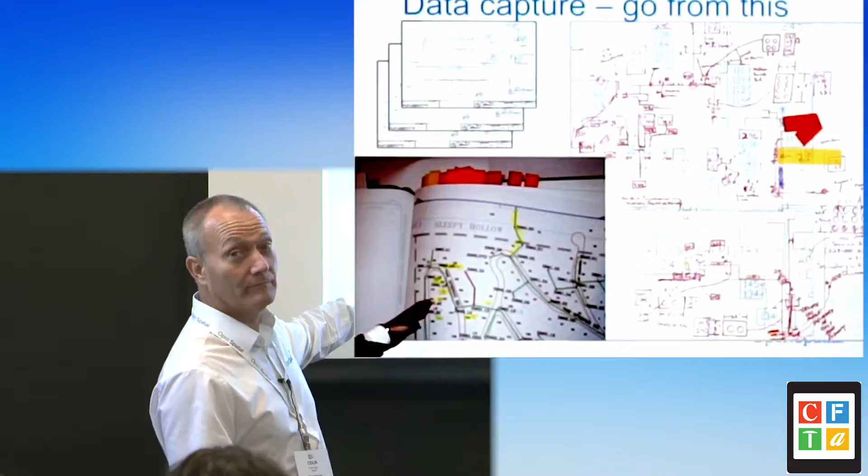There's some places with map books, paper map books. This organization actually had 3 of these map books, and each page has changes on it like that one. Okay, that's a problem. Or you have CAD stuff like this. You have a system-wide base map or a map for each utility, or, and this is subdivision on campus, you'll have your capital improvement projects, where you have CAD data coming in at different scales, different places, coming from consultants, in-house, whatever it is.

So the trick is, how do you get an asset inventory for any of the utilities? How do you get it out of here and into a manageable form? Common CAD stuff. This is actual campus data. CAD is great. You can draw anything you like. You can draw it really accurately, and it communicates a design intent. But it has challenges when you're trying to make GIS data.

Challenges like the line work is broken. You could never get out of this the total length of lines by diameter. And more importantly, what if this pipe breaks here? Where do I need to shut it off? If this is your data, that line is drawn straight down there, there's a gap. This thing is not broken at the T's. It's not modeling ready, it's not attributed. It's a picture. And it may even be schematic, not real world, so it's not even GPS.

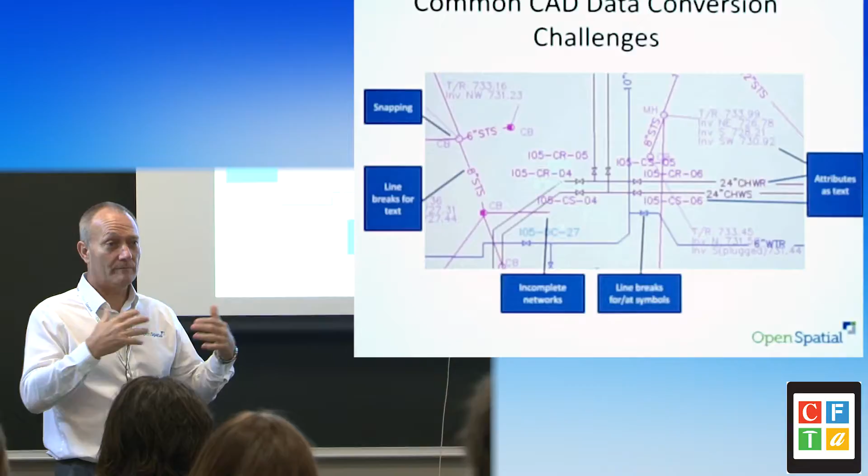So these are challenges. The most important and most challenging problem is attributes. The human brain is great. We can look at this and say 24-inch chilled water return supply. We can even go, hey, inverts, that means northeast, it's this one, and it's this end of that one. Well, that doesn't gel when trying to get a computer model of where this stormwater drains based on the design plans we have. How do you do that? Okay, I'll show you. Let's look at this a little bit.

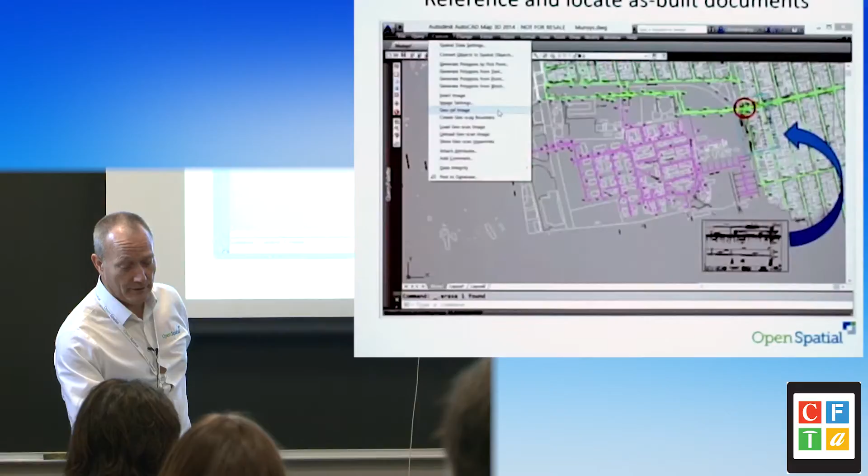If you have scanned plans, the first job is scan them and stick them in either document management or a folder structure. What we do is take the ones that have a plan view that you still want to get, and go in. This is Munsys, by the way. I'll show you live, so I'm not going to give you all that. But it's pull-down menus that are way over and above everything you get in AutoCAD, but built on Autodesk functionality.

If you know CAD, you can take an image, insert it into a drawing, scale and rotate it, and there it is. Then you save your drawing, and if nobody knows you saved it, no one will ever know you took the trouble to line it up. They'll probably just do it again. And that's fine. So we have tools for insert and georeference built in automatically. I just showed the points, georeference it, then create the geoscan boundary. So you see that little blue box?

That's the easy boundary. Just take the piece of paper, and I know the project plan is probably only half the piece of paper, and if you want to, you can draw a polygon there. But those polygons, when we use that function, we automatically create and extract from the image the path, the name, and then you can go in and add, well, what's the project number and what disciplines was it in? Some metadata like it was sewer or water or it was chilled water or whatever it is, and put it in there, and then save that little box as a GIS piece of data.

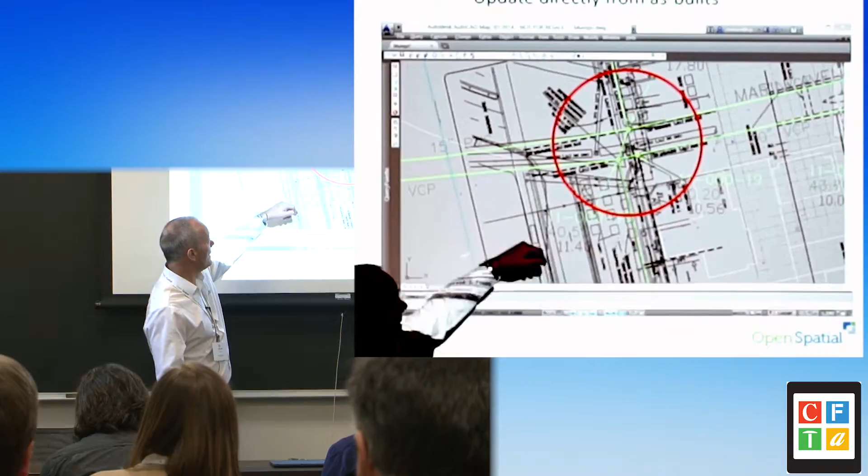What does that mean? If you do that on a bunch of plans, it means you can go anywhere on campus and say, what plans do we have on record right here? Because a lot of folks will tie a plan to a discipline. Well, the thing is, these plans have a lot of information on them. This thing has stormwater, there's the sewer being pulled off, heads up, digitized, but there's storm, there's traffic, there's electrics, there's a lot of extra stuff.

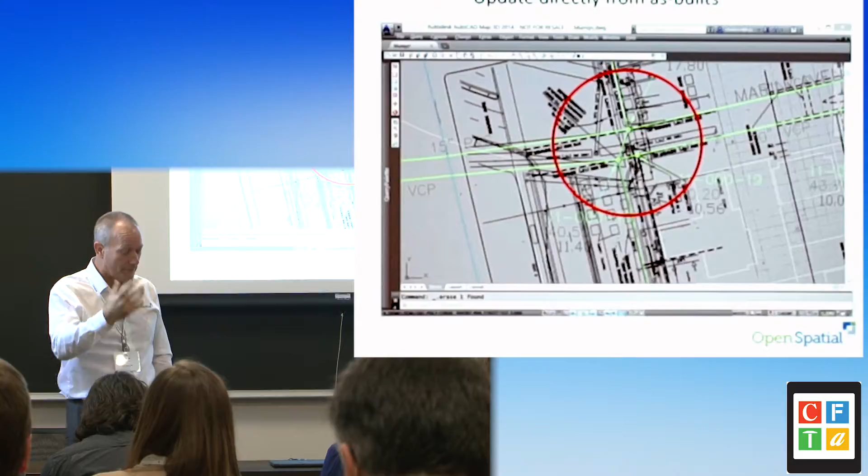So are you really going to go and put that file name on every one of those utilities? Probably not. Just put it down as a box, and now you can do a point in polygon. Hey, we have a GIS. If I'm at this point, show me any of the boxes that cover me, and I can list them and give you the file names. So that's what you can do. I mentioned that when I move on.

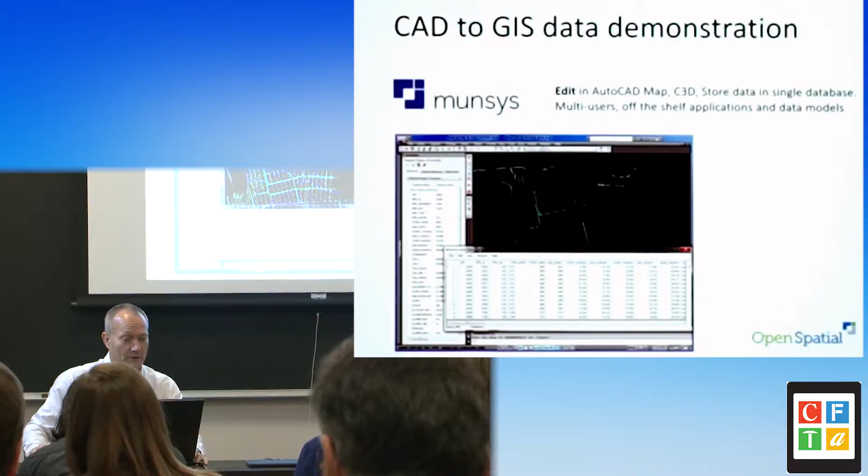So let's look at Munsys. Looks like CAD. Actually, it's not. Here's a listing of all of those things that you see right there, and here's the columns. So let's actually take a little look at that live. So I've got a live project that I have been working on, and so we can show you. So Munsys, oh, don't worry about my desktop. There we go. Good. All right.

So Munsys is an application that sits on top of AutoCAD. So if you know AutoCAD, you know 80% of this product. Training is a matter of days, okay? Because all you've got to learn is what are the feature classes and what's the concepts behind it. I show you a blank canvas, but I'm going to come back to that. Let's say you have a drawing like this one.

So first thing, normally your CAD drawings, you'll see these ones are either twisted or aligned. Well, that means I took the CAD drawing and I put it in real world coordinates. So twisted means this thing was drawn to fit on the piece of paper, and now we've put it in real world, so it's right there. And you can actually go in and check that the coordinates you see here are the ones you see down there. You can see it's got a coordinate system assigned. So there's a bunch of steps you need to go there.

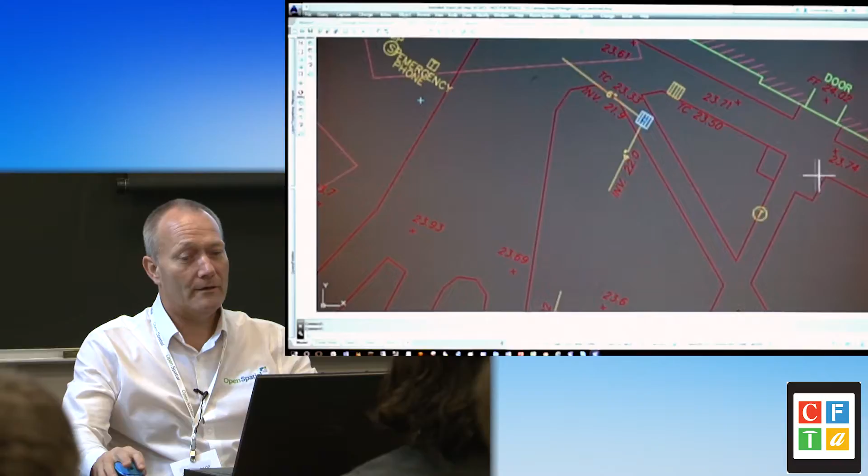But here's the campus CAD map, right? And it's the survey version thereof. So this is just CAD. If I click on that thing, it's a block. Okay? It's a drainage inlet structure. And this is a 4-inch line. Actually, it's 2 lines. It's that one and this one. And it's a piece of text. So how do you get that to be a real piece of data? Okay? It's located pretty good.

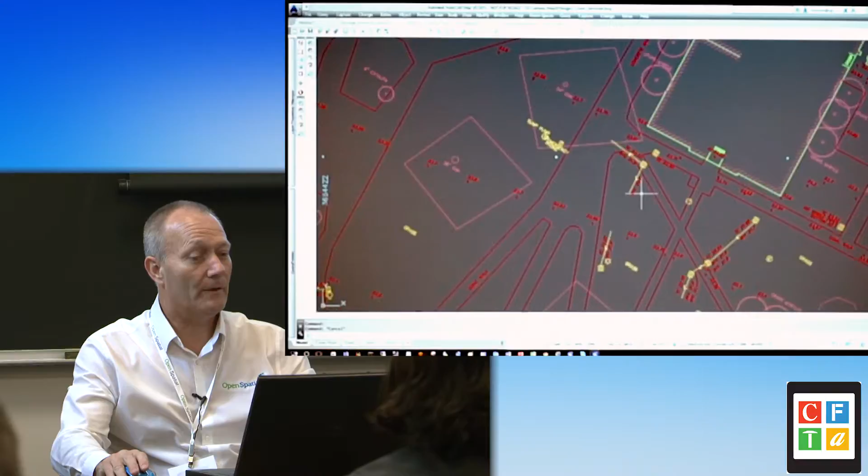If I turn on the image just to do a sanity check, no pun intended, and if I'm on a network, eventually I'll get a picture; I'm on a hotspot. So there you go. Okay? So now already I've got the CAD located. You kind of check that stuff, and you go in and do that. I'm going to turn that off because it's really going to make it pretty slow. And if you draw this out, this is CAD.

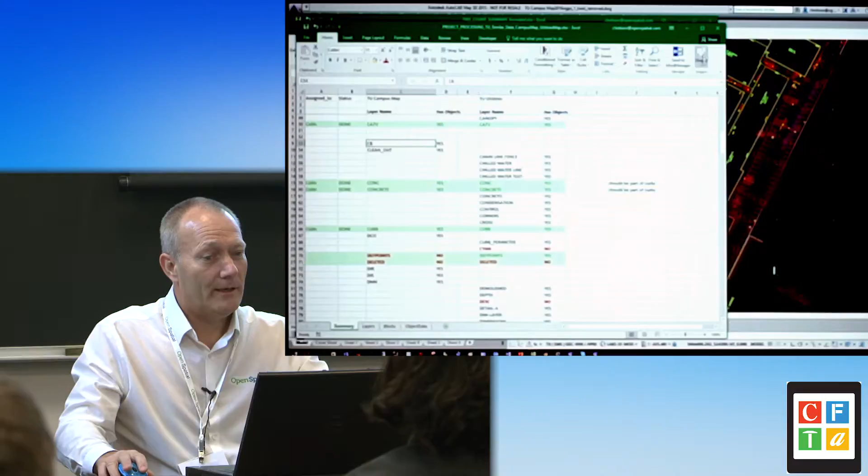So what do we do with this? I'll take this CAD drawing and I run an analysis on it. I'll come in here and let's go and open recents. There we go. I took that CAD drawing and ripped through it with a little analysis. Actually, they have 2 CAD drawings. The one is the campus map and the other one's the utility map.

The campus map has some utilities. They're being surveyed, so they're spatially accurate, but they're incomplete because the surveyor really doesn't know where the pipe actually goes. He just knows that from this manhole there's a pipe. Where does it go? Not so much. The utility map is the old schematic that knows where the pipes go. They're just not located very well because they were drawn in CAD over the years.

And that's very typical of what you get. Actually, this CAD data, certainly on this map here, is pretty good. It's laid out, so we can pull out the layers. So if you go to every layer, that's a summary. Each layer is this: this is the layer name, and this is whether it has data on it or not, right?

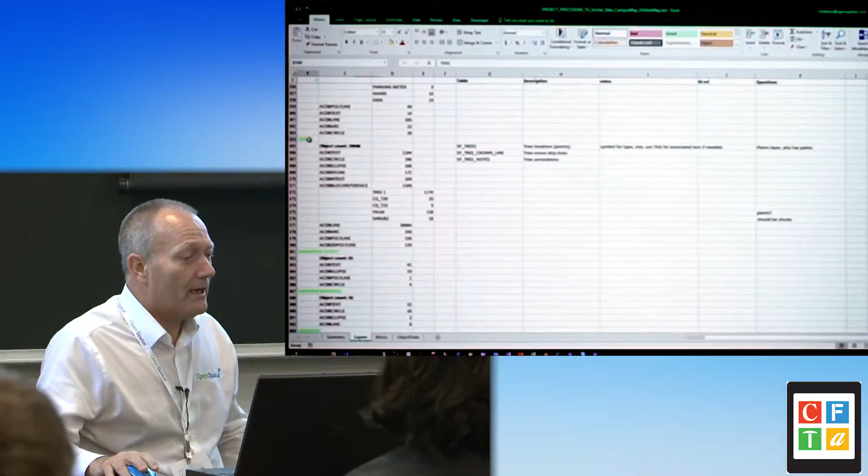So then if you go to each layer, you can say, let's look at, say, trees. I'll scroll down a little bit. So on the tree layer, we had a bunch of text, circles, ellipses, P-lines, text, a bunch of blocks. So there's the trees, and actually there's the count of the trees. So that's probably where most of the data is. And then there's some lines and arcs and polylines and stuff like that.

So how do you get this CAD data into it? We also look at the blocks themselves, what layers they're on. So if I go to the tree block, let's see. Yeah, here we go. Here we can see that it's pretty good. That means this tree block has all of them but one on the one layer. That's pretty good. Normally they're on all sorts of layers. But there is a red bud that escaped onto the elevations layer. And that's another thing that happens on CAD. The stuff just goes everywhere.

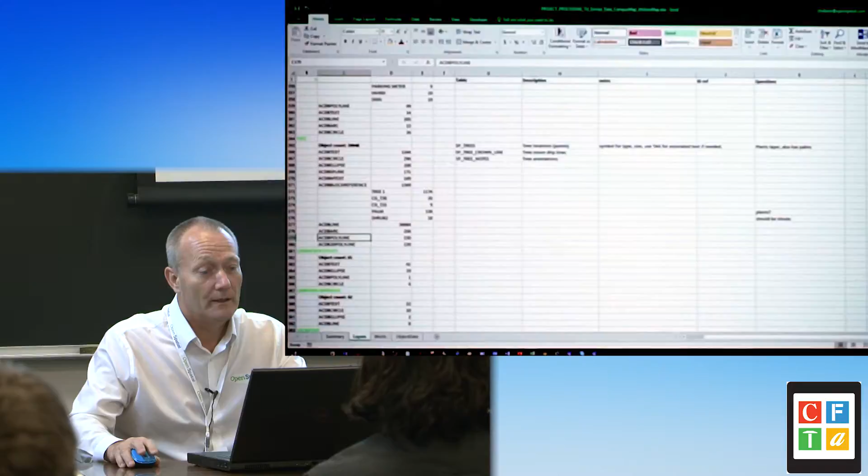The other thing you want to do is come in here and say, okay, now let's do the rel trick. So what I would do in Munsys, I can come in, and this is the other CAD problem, right? It used to be a tree block. Now it's a circle. Somebody exploded it. Happens all the time, everywhere. So that's the other thing you've got to sort out. So if we come in here, a lot of those guys are there, whereas these have not been exploded. So if I go to this guy, it's a block.

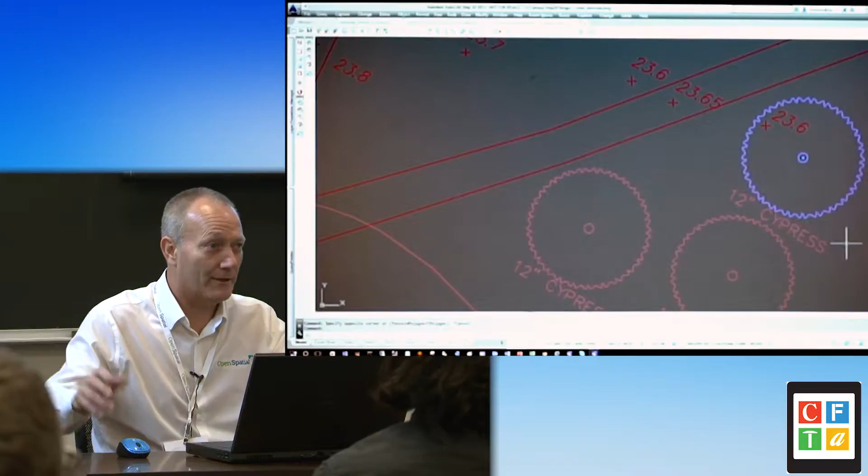Well, wouldn't you know, it's a tree 1 block, whereas it should be a 12-inch cypress with a block that looks like a tree. Okay? So that's kind of the difference. And that's a piece of text next to it. And then some of those have been exploded, so I've got millions of itty-bitty little lines all over and a circle in the middle and a piece of text. So those are all things you've got to deal with. Whereas the palms, they're pretty good. It's actually a palm block, and I can see it looks great, so that's fine.

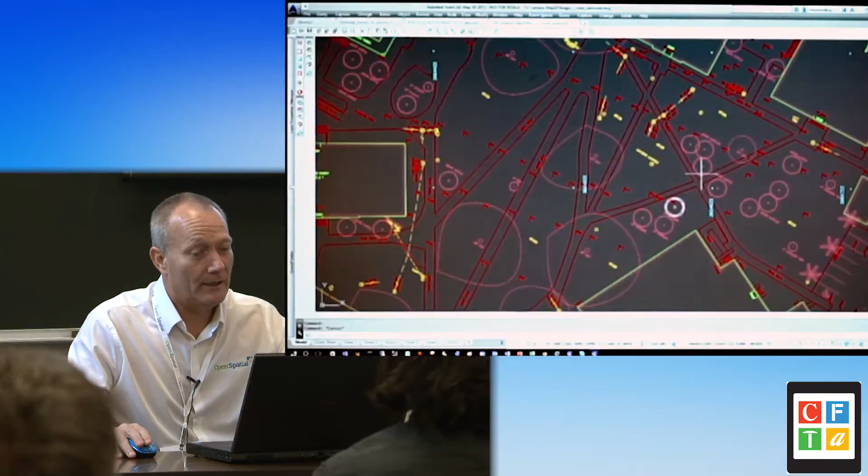So what we do in Munsys here is this trick between GIS and CAD. Munsys allows you to connect with the database. So one of the first things I did was connect to the database, and I'll just do it again so you can see. So this is a multi-user editing tool where you can have multiple people editing. It has full record locking. Each person can be editing different things at different times. And so I can come in here now and literally convert these things, if they're convertible, into intelligent database objects. So what's going on in the back end?

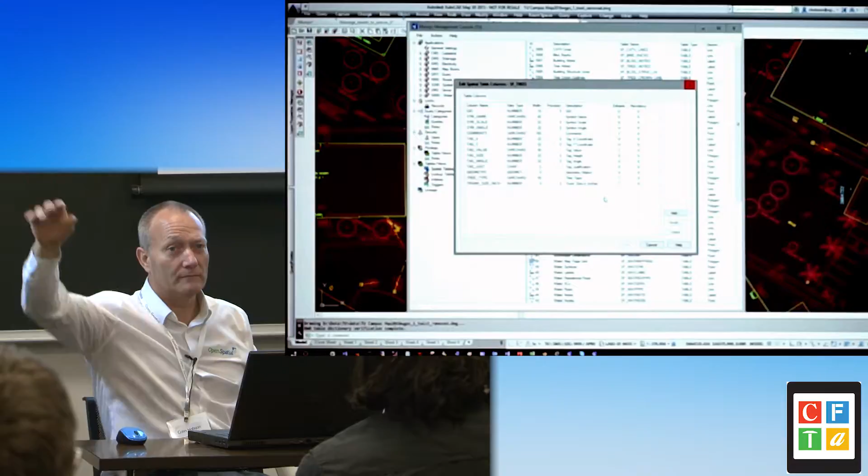In the back end, I've just connected to a schema of data. The schema means a set of tables in a database with all of their relationships and everything else. So if I look at the spatial tables, I actually have a trees table. There it is. And it has these columns in it. And what I'm going to do is take the CAD stuff, stick it in that table, and then I'll be able to do stuff with it.

So the way to do that: in Munsys there are different applications off the shelf. Sewer and drainage understand the difference between culverts and pipes in drainage, understand all the invert elevations, and have tools for you to automatically update those and build them out. Very, very powerful stuff. And to check that you've actually captured everything. I'll show you a couple of those. Let's finish up with trees quickly. So the Spatial Data Manager, that's our generic GIS. You can create any point, line, or polygon you like and add any kind of attribute to it that you like.

So let's go to these trees and see if we can convert some of them. One of the simplest ways is to go to capture, convert objects to spatial objects. If I come in here and go to trees, at this point I can just get the layer they're on. That's the simplest way. But that's going to miss out on a bit of information. That block actually does have information.

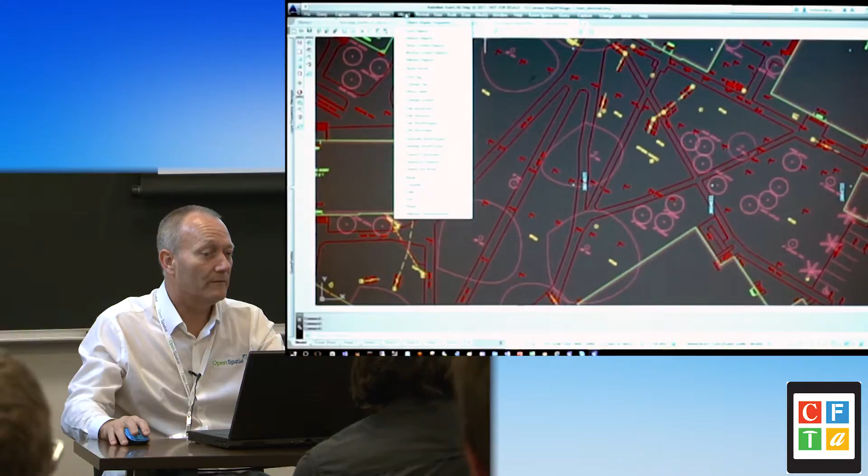70% of them, the block told me what kind of thing it was, so I want that. In Munsys we've developed - all these menus, by the way, are the Munsys menus. There's some CAD stuff like drawing over here. But if I come in here and use the Mun Convert, this is one of the bits of magic.

This is a Munsys thing that exposes all of the attributes of the CAD data, and you build it out. So step one is get stuff out of CAD into a database. Once you have it there in Munsys, you can still use CAD to continue maintaining it, but the data in the database is GIS data. It can be used by GIS. So that's bridging the gap between those.

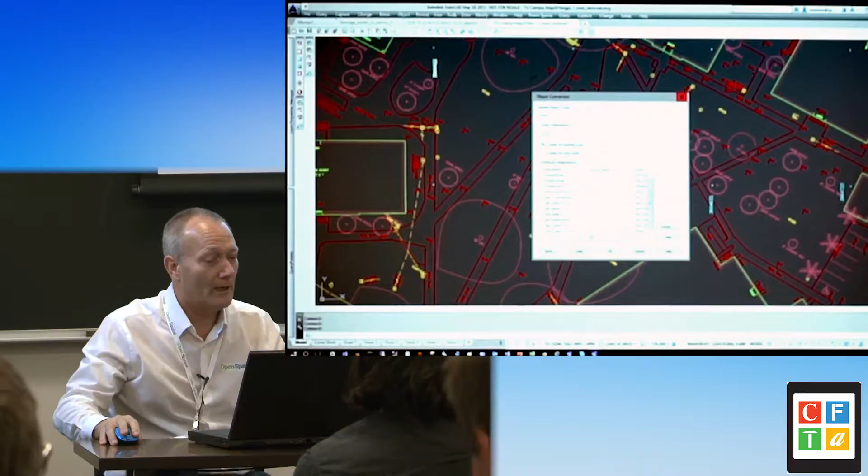Right, this tool, Mun Convert. You can go into, this shows you all the columns on that particular feature class. So I can go in on the symbol name and say, let's assign from the CAD drawing, I want the block.name - so this is all CAD properties. I can go to block name here and say, okay, that's going to go into the symbol name.

And actually I want the blocks because somebody took a lot of trouble laying them out, getting their size and scale - so this is symbol scale, so I get block scale there. And I want the angle, so I just pull that out of here, block rotation. So I'm building this out.

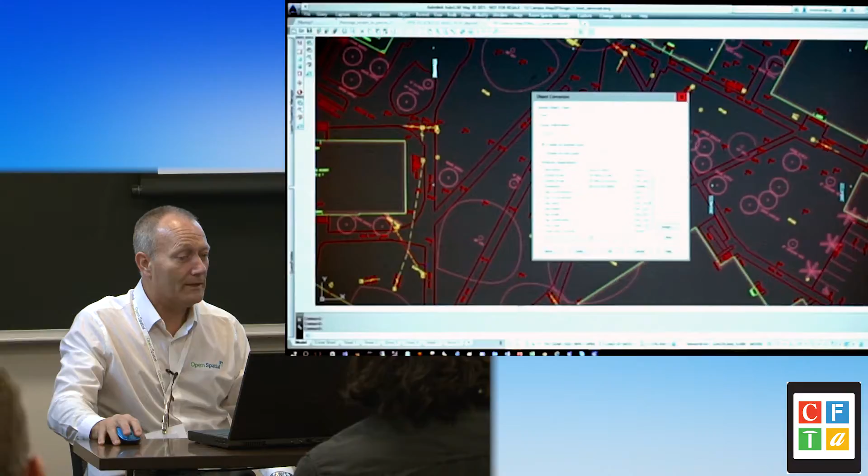I can put anything else in here I want, like I can assign a constant value, and I'm just going to put in that I'm messing with it, so I can come back and track it. There's all sorts of stuff - if I wanted to, I could do certain trees at a time and whatever, and I could save this profile and use it later. So if you actually have the same drawings over and over, you can define these data loading profiles.

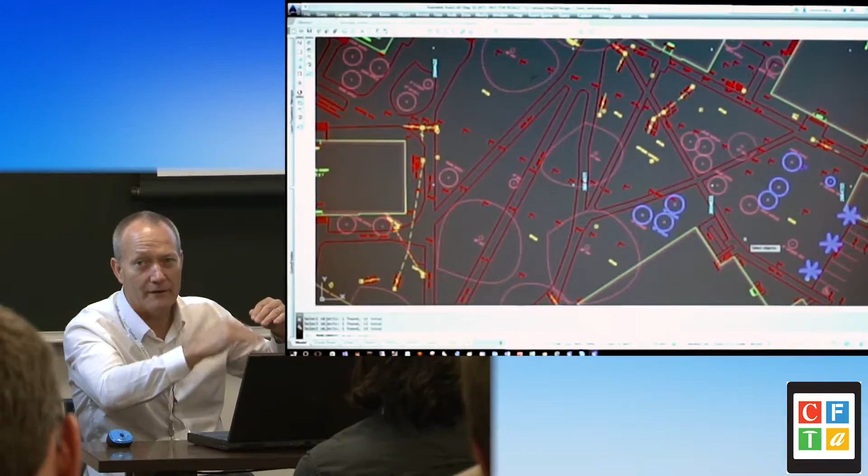So I come in here now, and I can go in and select the trees I want to do. I could just drag a box - let's do all of those guys, and set to not do an additive selection. So let's take these guys, I'll just do a few. We can pull them in, maybe a palm or two. I could drag the whole lot, or I could have isolated the layers so I just had those blocks, and then drag a window and grab the whole lot - get the picture, right?

So I put those into Munsys, and it said it's converted 14 of that, and there's 4 warnings. When you get a warning, it actually puts a circle there, and it'll tell me, wait a minute, the block name wasn't defined, or anything like that - it'll tell you.

So you do that process, and then what we've done is we actually go and look for text. If you have text near the object, we have rules where I can go and search for this text string within a distance, and then I'll find the exact position and automatically put it on the object. So let's go back to this. If I come here, I can run - so that was how you convert it, and I'll post that to the database.

Now if you want to get the data back out of the database, I can go here and say, well, let's show me the trees. And that whole area is in all of campus, so actually I'm going to just set a filter for any specific area or zone. I'm just going to do a box for everything and go run that. And so now you're going to have all those trees come in.

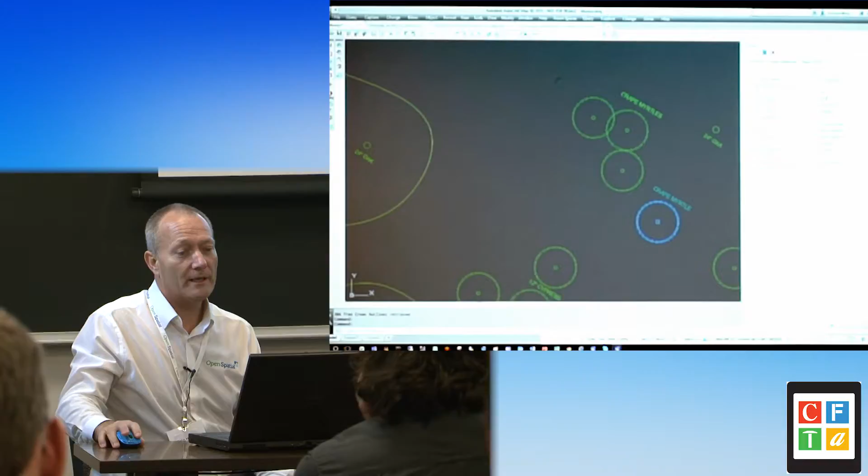They've been converted. So now you see the same thing, right? Although, as I select on it, you'll see the text comes with it, and now it's in the database. It has the block name, pulls over the scale it had, and we literally threw into the tag value - we use tag value as a common, put text in there, the text that went with it. So that's now GIS data.

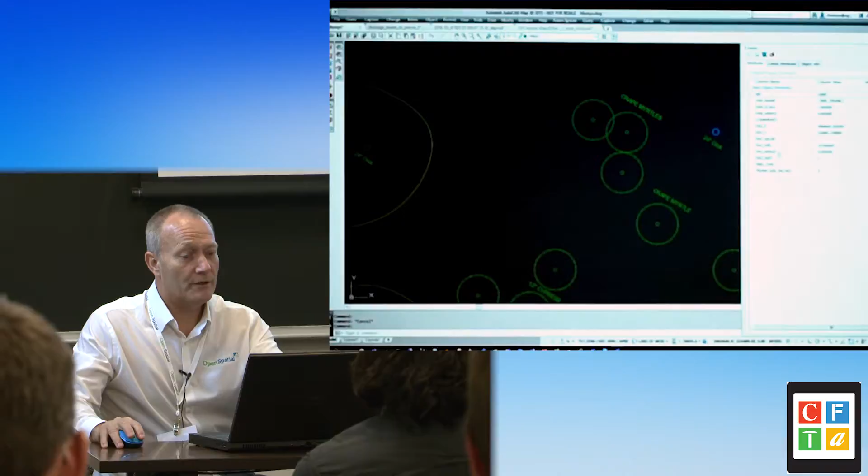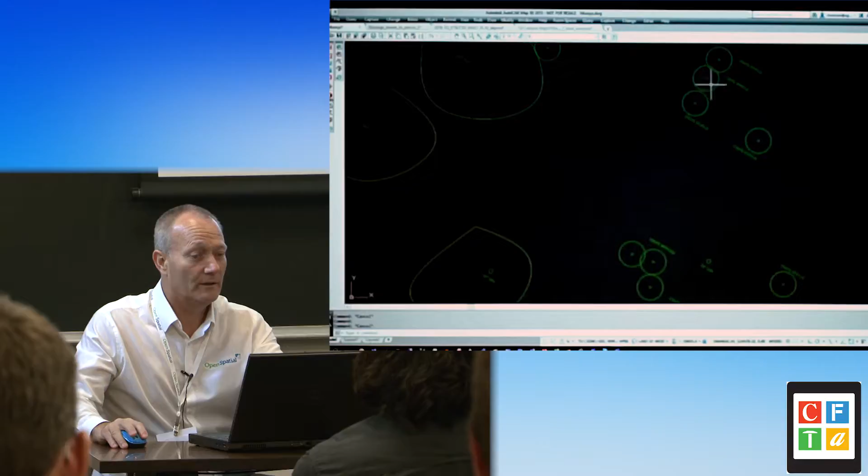And you can see this guy is a 24-inch, well, actually it's not, it's just a tree trunk. So the symbol name hasn't been processed yet. This is work in progress, and that's what you do.

Let's look a little deeper, for the tech folks in the room. If I go here, there's the trees table. Our database is using Oracle, and we use the geometry column in Oracle.

Well-defined data sets, completely open tables. This is the free thing for listing database info. Here's those columns on the tree table for the data we're just looking at. The tag values there, and the position - tag X and Y is the position of where the text is, and there's the geometry column.

So what I've done is, when we converted the data, all we could do is get this text string right off the drawing. And the same will be for inverts and top of curb and all that other stuff. So I pulled that out and put it into the tree type and size columns. How did I do that?

Well, once I put this column in the database, I can run a simple bit of SQL to split that out into 6-inch, holly, and put them in different columns.

For the real techies, here's what it looks like. I just ran an update statement to update this column here, and I've extracted out of it just the numerics out of that tag value column. So with those simple bits of SQL and that simple conversion, I now actually have the data for the trees.

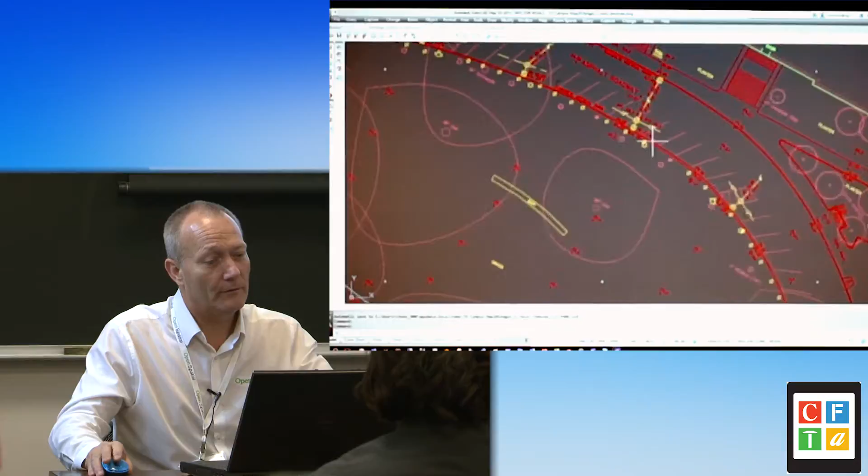Let's look at stormwater. So these guys have this thing that's got the stormwater from the survey. The surveyor went here and says there's a pipe going there, there, and there, but they really don't know where this pipe goes. Does it join with that one? Don't know. But they also have this other drawing here, which is the old utilities map.

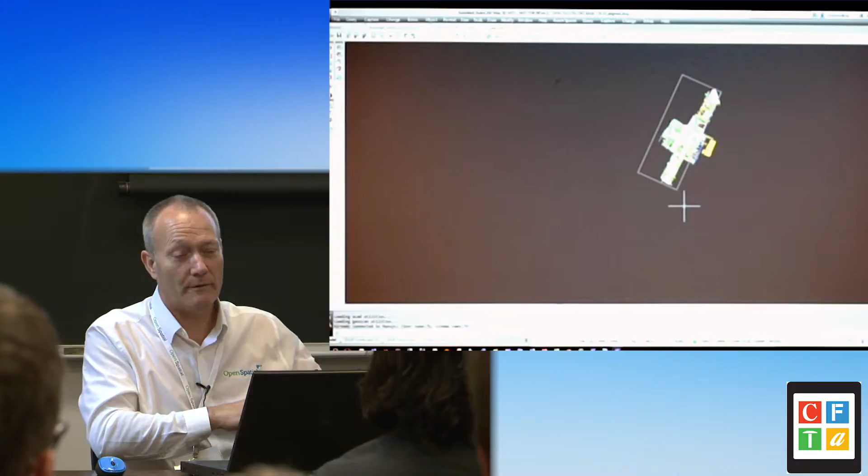This one is really not to scale. It was architectural, and it was at kind of zero, so we've moved it and fixed it, and we're literally going to stretch it as we go in each section so that we can get it as accurate as possible. But it looks like this.

All right, so it's more schematic. You'll see there's a drainage pipe that actually links all of those. So probably it drains from there and goes to the left. It's drawn a little schematic, but it probably goes through that manhole and through that one. Actually, it's probably not even curved at all - it's probably straight, manhole to manhole to manhole. It's a drainage pipe, right?

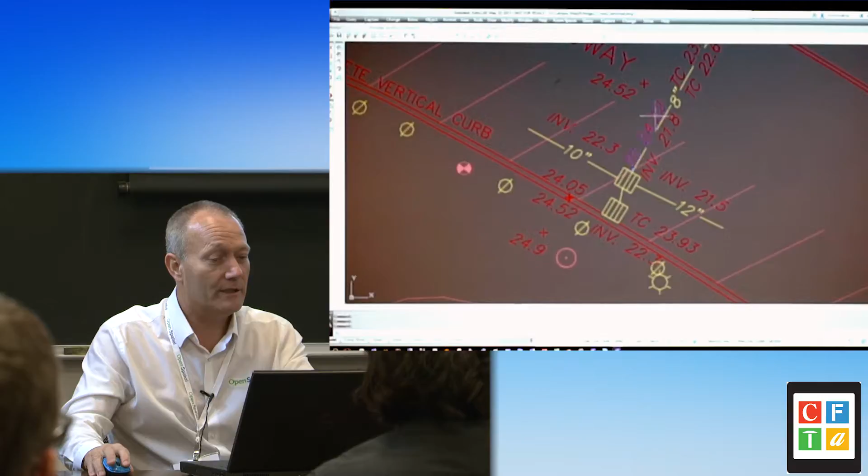So what I can do is go to this map and convert these to Munsys using the Munsys Convert routines I just showed you. For now, I'm going to ignore the invert elevations because there's some really useful data right there, and convert those into Munsys.

So let's go in here and pull in the Munsys data. What I'm going to do is set my area of interest right here, just so we don't query in the whole world while we're at it. Go to this - notice I don't open a CAD drawing, I actually pull in data from the database. So I can go to drainage and pull in the stormwater.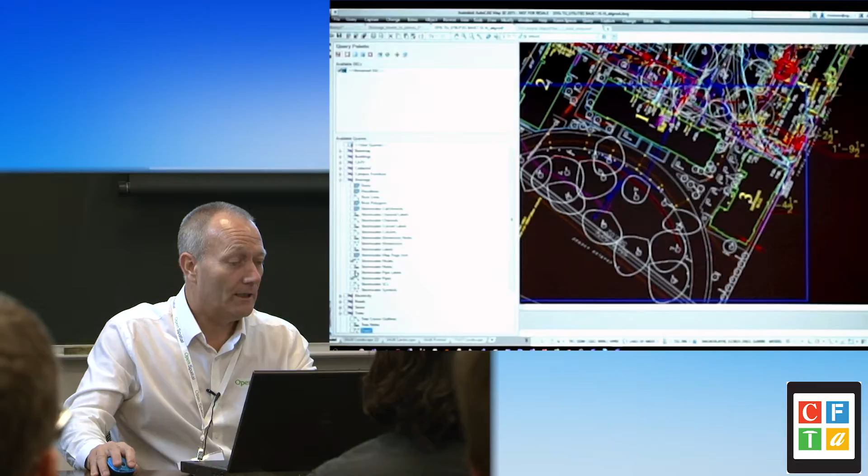So we've processed some of these, those ones that you've seen there, stormwater nodes and whatever, right? So there's the survey stuff and there's the other stuff, so I can see how they align. And clearly I can say, well, wait a minute.

This pipe here and that pipe, between these two, those should be joined. So I'm going to lock that guy. Okay, it doesn't allow me - obviously I've got a bunch of things locked already, I was messing with this. So let's just unlock these quickly.

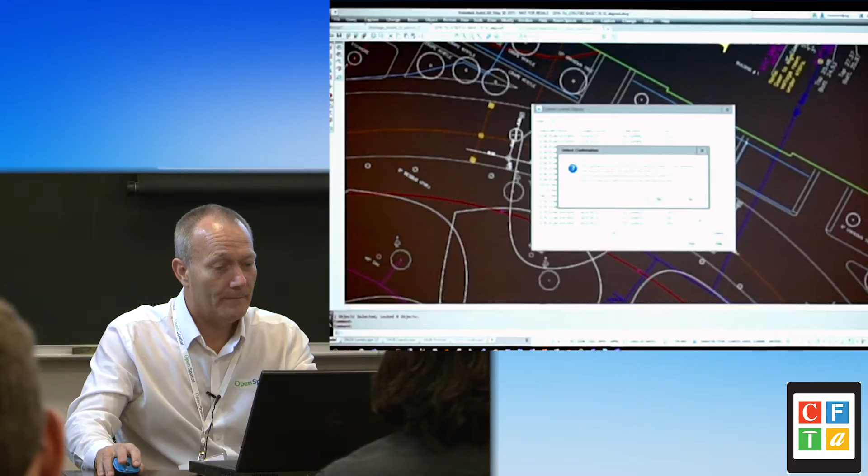And erase some objects on the... I'm just going to query these two things in again, just so I get everything in sync. So we'll run that query again. Go. So now we can go lock that object.

So I'm going to say, let's take this 8-inch pipe here and put it this way. This is where the CAD GIS thing is really great, because the CAD guys know how to deal with all these snaps - pull it there and pop it right on and snap it, right? So I've actually stretched that pipe like that.

It should be there. The problem is, what about directionality? So I'll change to the drainage application - all that does is roll my top menu, but now I have a top menu that's intelligent for drainage. So when I go now, I can see I'm dealing with drainage pipes, channels and culverts, inlets, manholes and stuff like that.

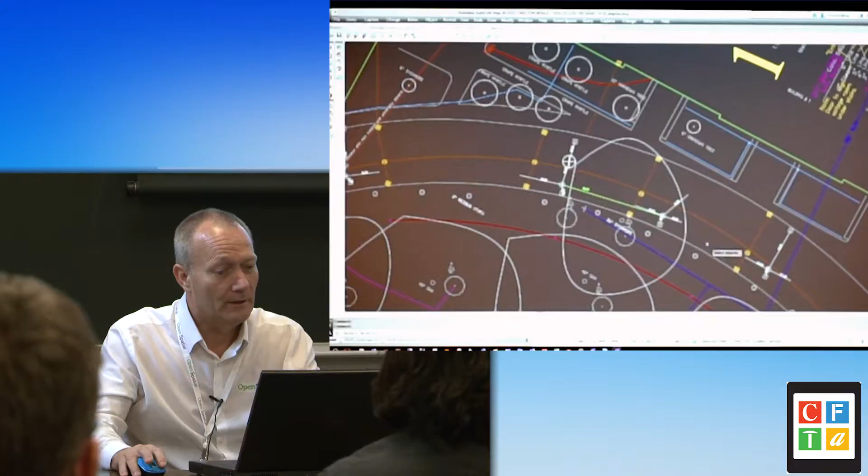But let's go in here and actually just show the flow direction. So this will show the original direction the CAD was drawn in. Okay, so if I don't lose my mouse - yeah, there we go. I'm going to drag it over there and draw it on. So it puts little arrows down for me to look at, so I can see, well, sorry, this thing's going in that direction. So we can go and switch them, change the flow direction.

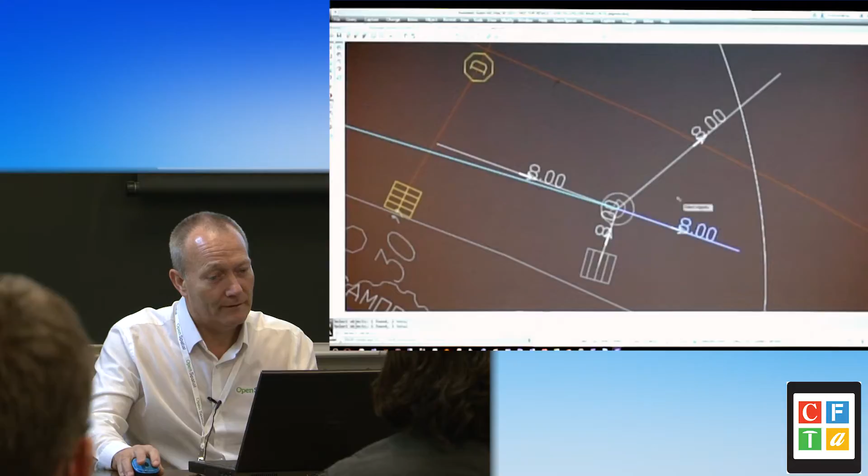That one's wrong, this one's wrong. Where's that one? That is wrong, that should be flipped - that's coming down. That's good. Oh, that little guy's wrong, and flip him. Done, okay?

So that's step one. So let's go in and actually check those. What you do before you post to the database, you have to validate these objects. So there's a validate little thing here - we select the objects and it's going to shout at me.

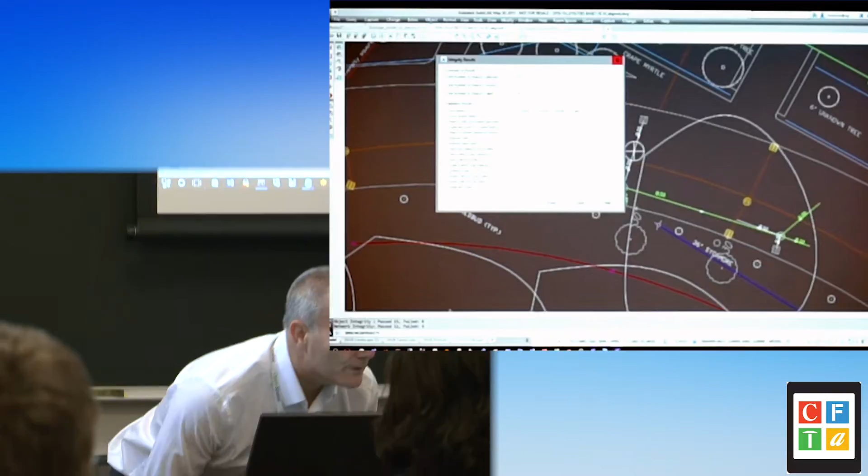So it looks - this is the whole point, this is how you get good data. It's just checked: is it inside your database? Are there drainage nodes that are not connected? Are there pipes that don't have the attributes? It's checked all of those things. This is what I show you in training, how to deal with this.

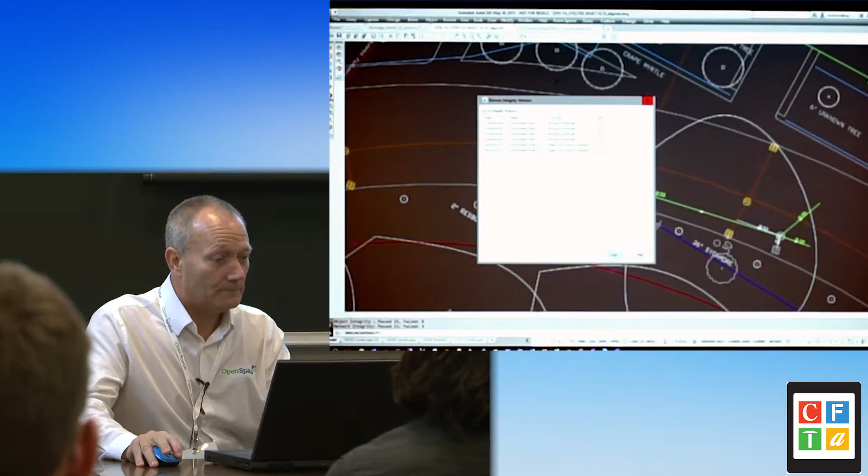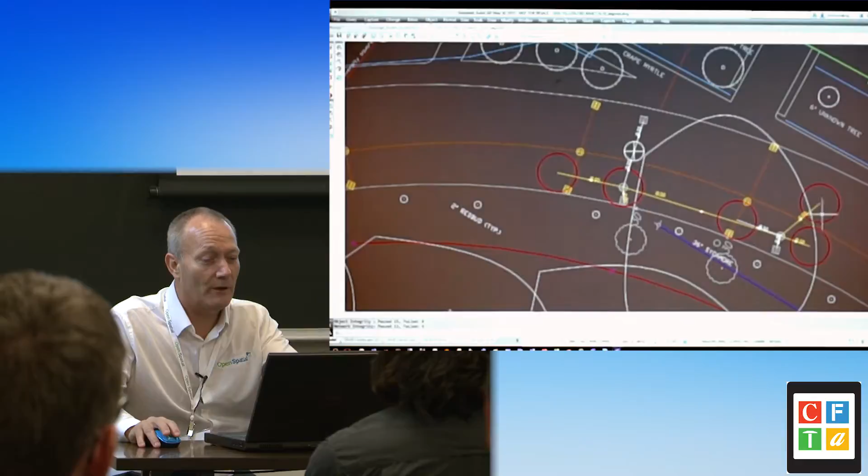Actually, you can hit errors and it'll put a little circle next to where those are, and you can zoom to them. Okay, so those red circles will tell you the problems. So here's a drainage pipe, this one - if I move my mouse, it says look, there's got to be something on the end of the storm drain. If you don't know what it is, put a junction there, for heaven's sake, or something. But it's not going to pass into any modeling program - it's just not going to fly, because drainage has to have a start and end on it.

It'll come in and say, oh, you see this little guy, this red one? If I click on it, I know exactly where it is, because it's the base of that - that's that pipe that goes there. So that's easy, because I added a new pipe. This one is messed up, so what I'm going to do is go and delete that object, right?

So the delete is actually doing a database delete. So you can select and hit erase on the drawing, it's still in the database, because the database is the data of record. So I put that, now it's flagged for delete. And the next time I post, that's gone. So what you literally do is, as you fix these, you go and put them down.

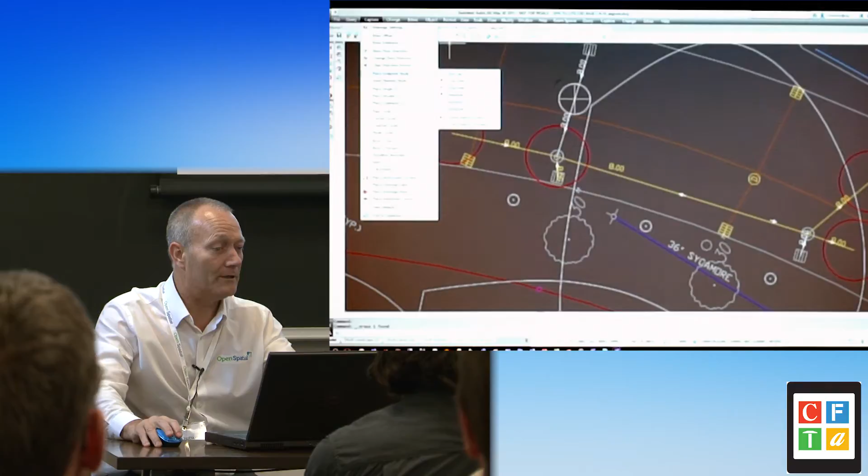So you can come in and say, capture endpoint node. Let's just put a drop inlet on the end of this pipe. If I select not a drainage pipe, it's something else, it will not allow me to do that. Because it knows on the menu what it's expecting, it'll put it down. Don't worry about the scale, it'll figure that out.

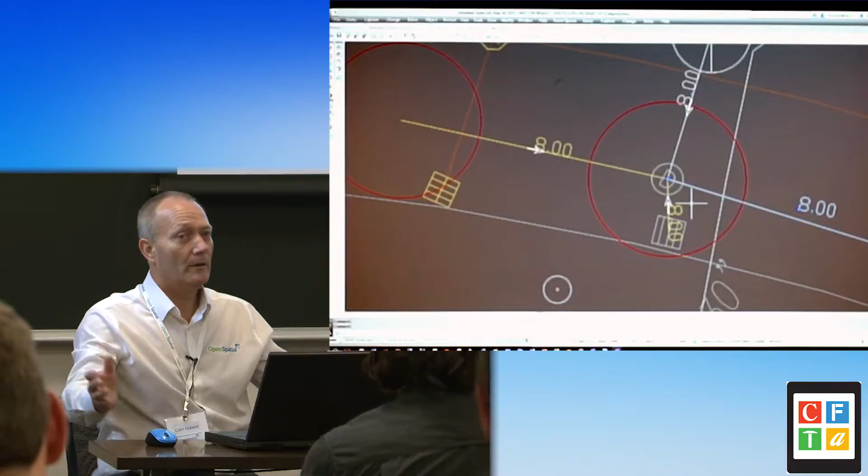And so you go. And it would show you, if I pulled this off and it wasn't snapped, it would show me. Or if you were in water and it was a reducer and there were two pipes coming into the reducer, it would say too many pipes on the node. Business intelligence within the apps themselves as an off-the-shelf application.

So I'm just going to take that stuff, run the integrity check again, ignore the errors. It also checks for network integrity. So if I do that now, what that's going to do is build out the start and end nodes and build out the topology. So this thing actually knows this pipe will have entered into it the start and end node. I'll post that to the database. It's either one to be deleted.

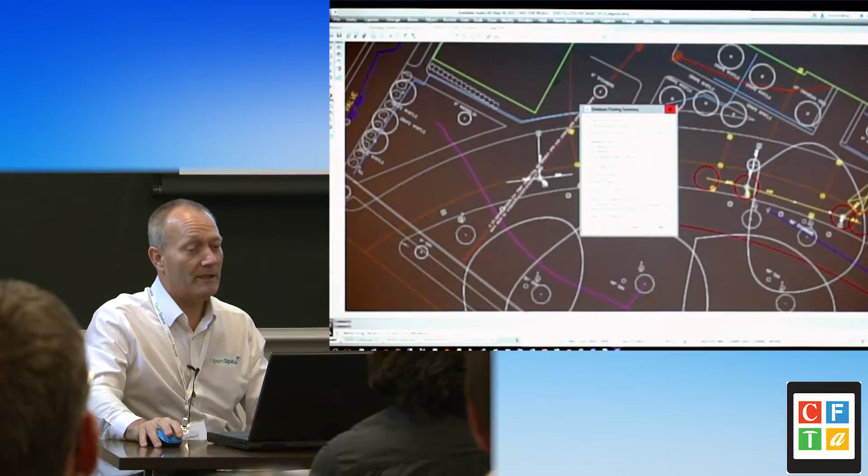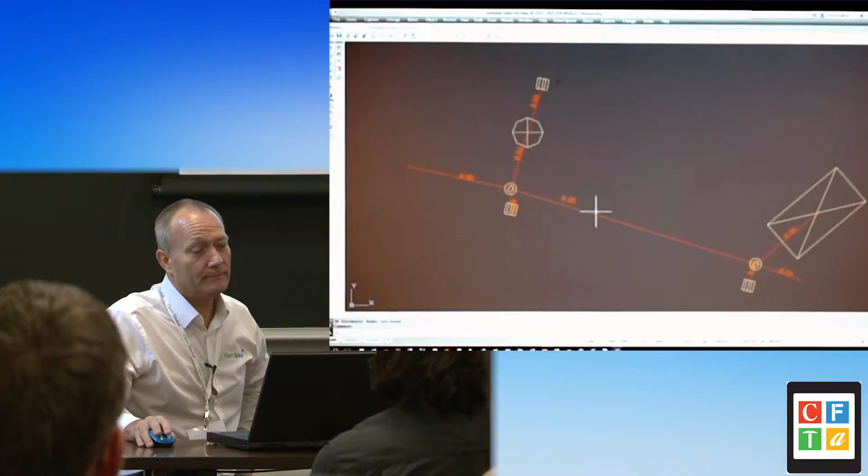You can be using a drawing that's in a different coordinate system than your database, and post that to the database. So it's posted them, we're done. So now if I go to a blank drawing and I go to that area and I query back that information, where's that query? I got stormwater pipes. Yep. So there it is. All put in. It's done. I can throw away that other CAD drawing.

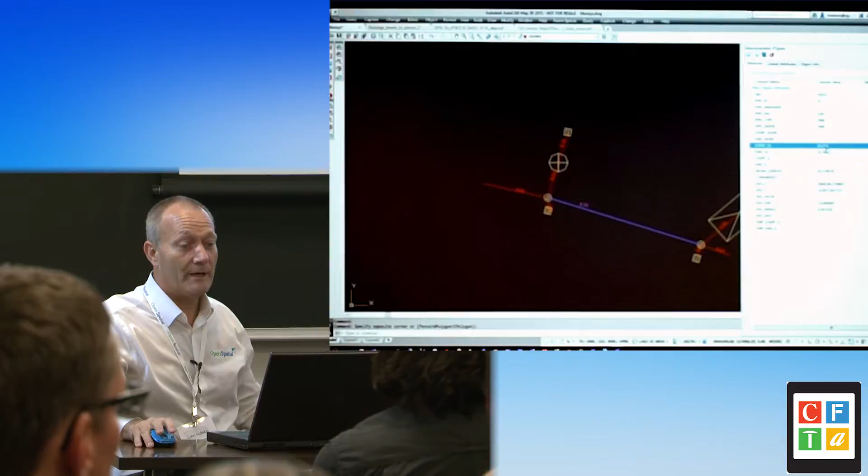It's in here. And if I go and look at these guys, you'll see it's built and put that in there. It's actually picked up the ground levels from the depths on the manholes and applied them on the pipe. So this pipe, obviously the one manhole had information on it on the end of that pipe, so it's already inserted them on here. So we start building out that whole relationship. So that's just to give you an idea on how to go through a CAD drawing, pull this stuff up, and then have this wonderful editing tool to be able to do it.

So the moment you change something, it flags them as modified, and then you can go push it into the database. When I try and push it into this database, it's going to tell me, hey, you didn't validate, and currently I have validation switched on. That is a setting you set up to say those columns are mandatory. You have to have diameter on a pipe, otherwise it ain't coming in. Stuff like that. Very important, really helps you. So that's Munsys. Any questions on Munsys before I move along?

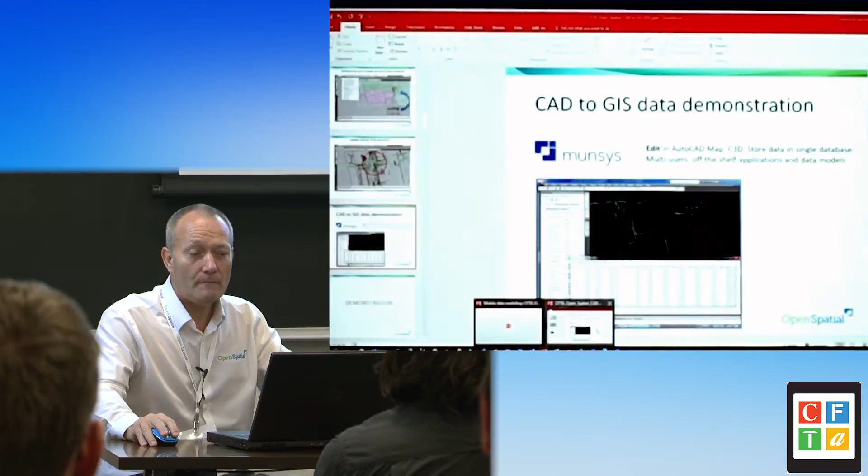I have one. Yes. How does it deal with dynamic blocks? With dynamic blocks, what we're doing is basically taking that data and splitting it out. Well, first of all, the block itself carries the primary information, and then the dynamic part is when you want certain bits of stuff displayed and not displayed. Or it can be completely different. Yeah. And so we'll actually split it out into different zoom scales and store the information separately.

So dynamic blocks actually create a problem because they're contained within the block itself and nobody else can get to it. Multiple. Yeah. And so you actually have to go and pull out, well, what's the intent of it? So first of all, it has the primary asset information. That's easy. It's then the representation. So for that, we actually can have multiple symbol names and then different bits of related text to go with it.

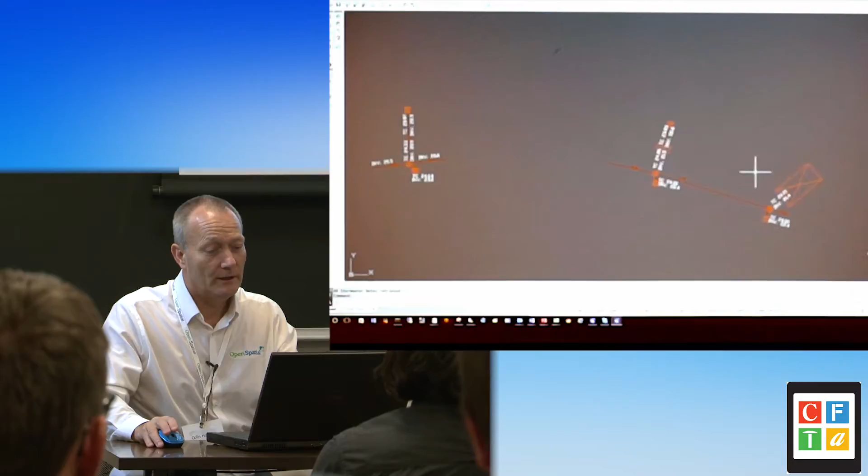Actually, I didn't show you another one. It's a good question. The other thing that is a challenge, let's go back to where I was. We'll zoom to that little spot in here and query in a few things. Pipes, nodes, go. The other thing is how to get the data that's in text onto objects themselves. And so on that, you can see this is pretty good. If I click on that node there, it doesn't have the depth yet, it doesn't have any size or ground level or anything.

So what we do there is I put on the menu various routines. I'll just show you one here quickly. Processing. Let's do util. So say I want to get the ground levels here. Because we're in AutoCAD, I can use the full AutoCAD functionality and our database, pushing stuff into the database. So what I'm doing is running essentially what I put on the menu. And it says, show me the source object. So I want that manhole, and I want this as the top of cover, which is what the TC is.

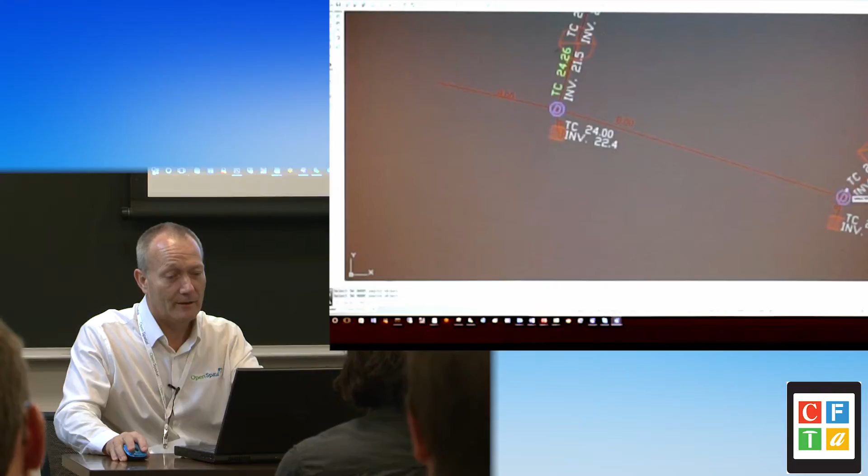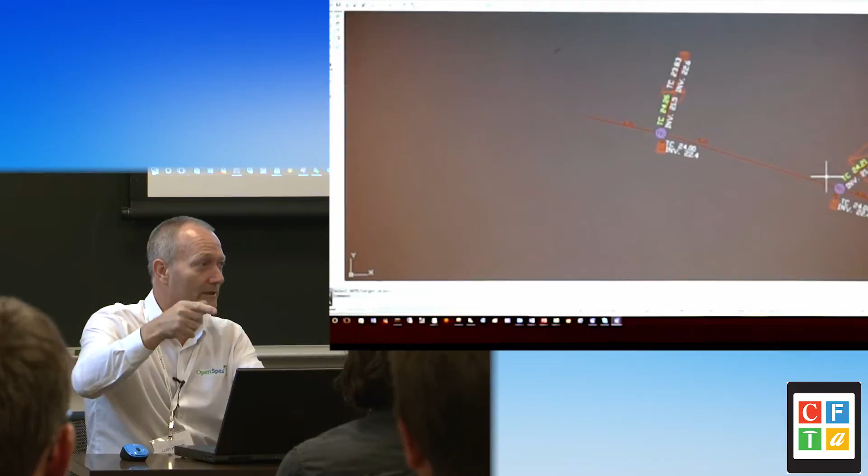And I've literally now tagged that thing with this. And so I can go and repeat that everywhere. I can say, okay, that's the text. So this goes a whole lot quicker than typing it in by hand. And at the end of the day, I've also got the position of where that text was, so that when it's actually in the GIS, it'll appear in the same position, but it goes with that. It's now an attribute of the object. And so that's huge, because the layout of all of these is a lot of time and effort. So that's kind of how we do that.

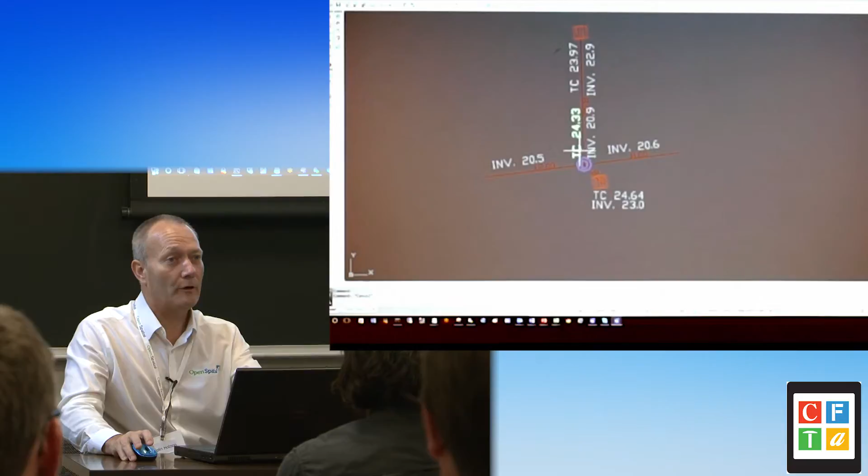I do have automated routines, and I could use it in this case, and I haven't yet because of justification problems on the text itself. We have routines that look at proximity. So if you've got a manhole, I can say, okay, if there's a text that starts with TC within 10 feet of this manhole, then accept that it works on that manhole and stick it on. The problem is you get these little muckers here that are left justified over there. So it's not within that distance. So you have to look at it.

Sometimes it's better to automate all of that and then go and fix the anomalies. Sometimes it's better to just build it out by hand. Because we're having to look at these pipes from two different drawings at the same time to get that information in, I'm like, let's just build it out. With this routine, it goes pretty quick. You can explicitly say, yes, this is it.

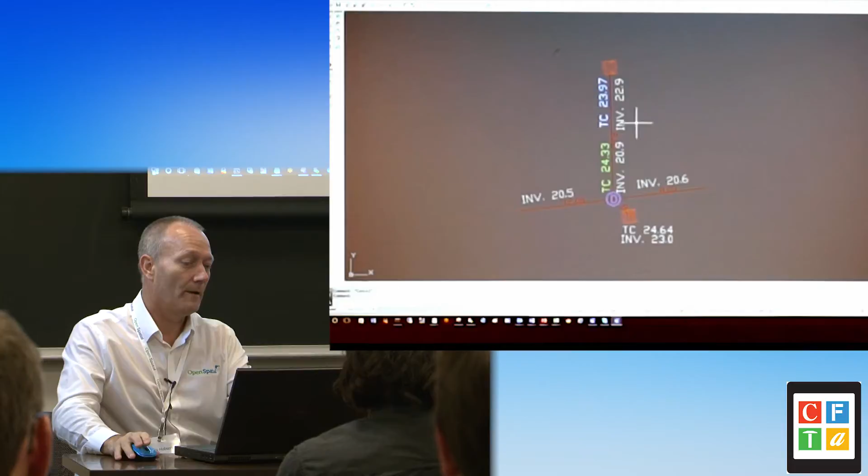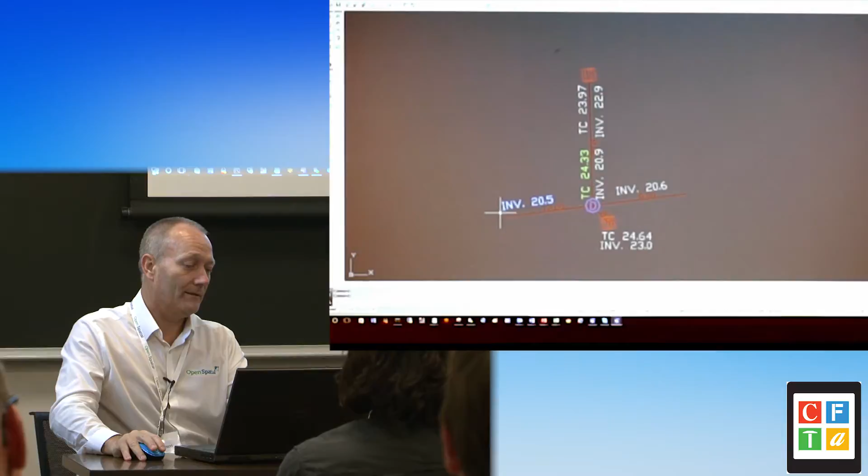The other thing is the inverts. You have to know that that goes with this and this goes with that. And it looks fine here. That one's easy, but you'll get other ones where it's not as clear because there's another one next to it. So this text is justified to the end of that line, does it go there or to the next one? Stuff like that. So with the directionality, you want to pretty much have someone explicitly know the direction and then go and put in the inverts.

Otherwise, it becomes a little sort of mouse on a treadmill, because now you switch direction, you've also got to switch all of the starts and ends. And we've got routines to do that, but you just don't want to make work for yourself. There's enough work. All right, so that's it. Going from there to there, where we've got this stuff now pulled in.

So if I come in here, and set my GSC wide open over here, we can come in and just query in pretty much a whole bunch of stuff. So say you do buildings, polygons are also fun. We've got nodes, trees, drainage, sewer. So you've got all of this stuff built out. Campus furniture, so bike racks, CATV, go.

So when I run these queries, it's literally going to the database, and each one of those is running, and probably I have that filter still applied on the tree layer there, that asterisk, so it's still got that filter applied. So I could clear that, or I could save that query for other reasons. Where are we? Reset, yeah.

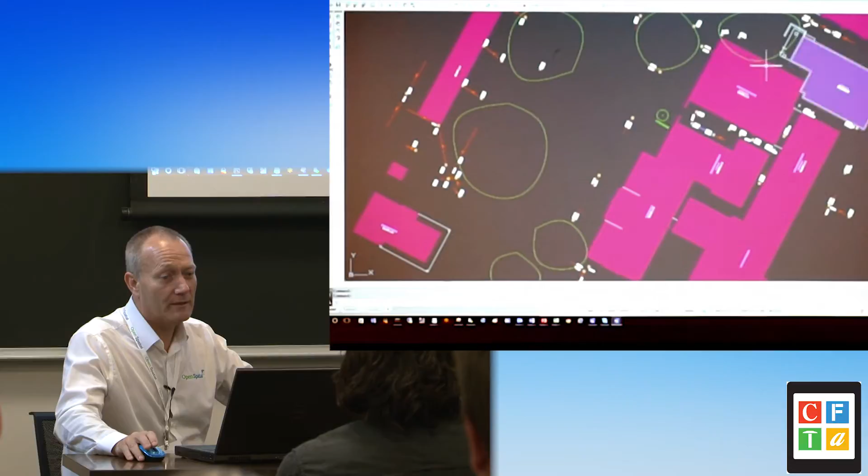But now we're looking at a campus map that's more attributed, got diameter on the pipes already, you can see all of those. So if you change the diameter, that label will change automatically. Stuff like that, you can see the buildings are in there, and everything's nicely aligned, and you start building out a data set. These lines are the crown lines for the trees, drip lines.

And little trick there, don't store the lines as the tree. If it's a block, you need a block. So we've got the tree stump. Actually, if I run the trees now that I've taken that query off, you'd see them there.

So there's the actual stump of the tree, and you can see the size. So that's a 48-inch oak, and there it is. Okay? Right, moving on.

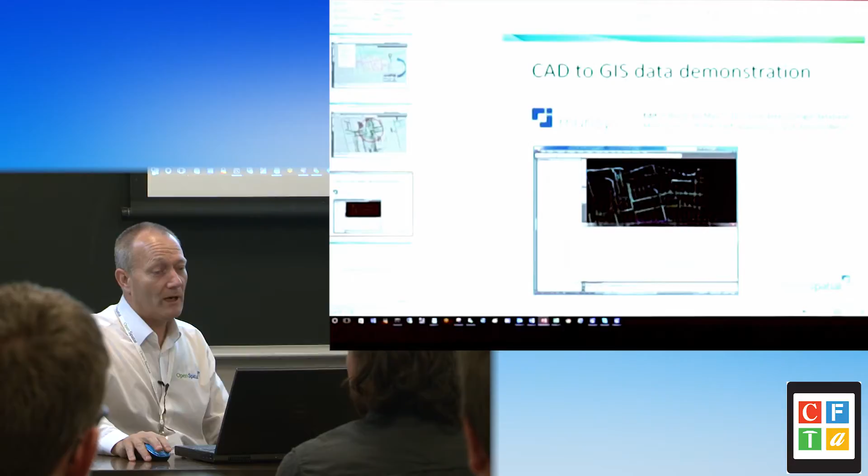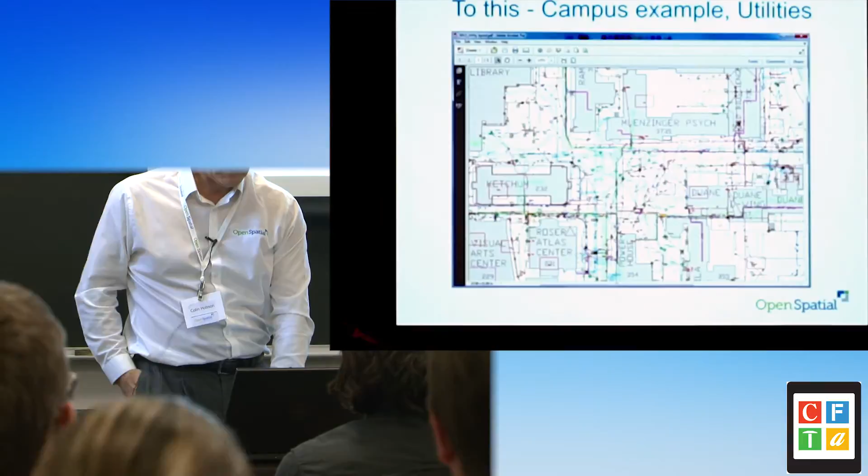So that's what I mean by data here that is structured, it's complete. Oh, there's directionalities on there, so we can do trace up and down, knows the difference between a water and a sewer and all of that. So I just showed you all of this live, so I'm going to whip right through it.

So I have one question. One question, yes. So that drawing is also an Esri GIS, for example? Because I know it's a GIS because we attach and it tells you all the data, but is it also an Esri GIS? No. Good question. There's a slide that'll help with that.

If you wanted to look at that data in Esri, you would connect it. I put it as another GIS. Any GIS you can connect to this information. We use OpenGIS Consortium standards. When you talk about open data, you've got to be really careful. Open data doesn't mean, oh, we have a way to give it so everyone else can see it, but not edit it. For me, it really means it's completely available without us being there, and it's actually the source data.

So, little thing. I showed you the Munsys Management Console. That's just an app so that you don't have to be an Oracle whiz. I mean, we literally have folks where the CAD guys are running the GIS and doing the database management of adding columns and pick lists and all of that stuff because it's off the shelf and out of the box.

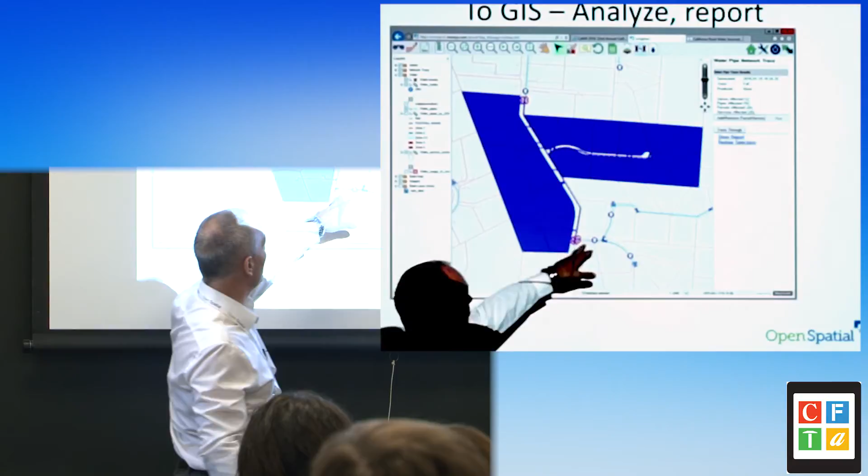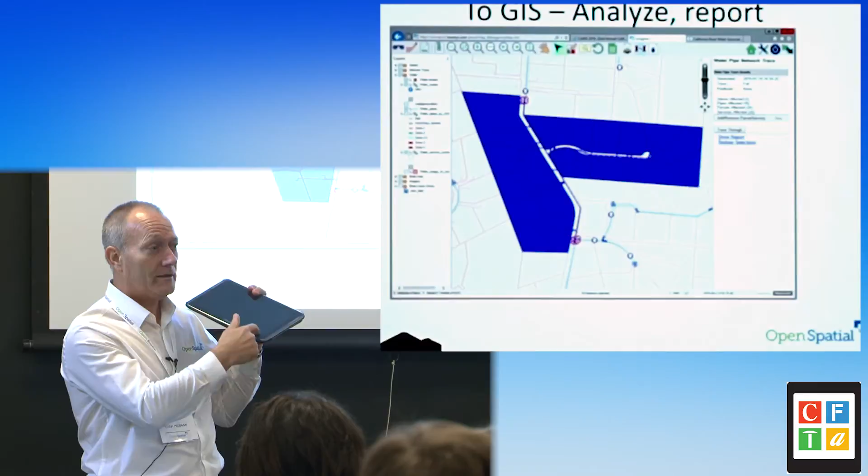And you can trace right through. So say that valve is stuck, you can select it, and it will run the thing again and do that right on a browser. So anybody. And that browser is web-enabled, touch-enabled and GPS-enabled. So if I run it in Chrome on here, I can hit, say, where am I? And as long as I'm on a web connection, I have this information, my full GIS drill down right there. And you can get reports.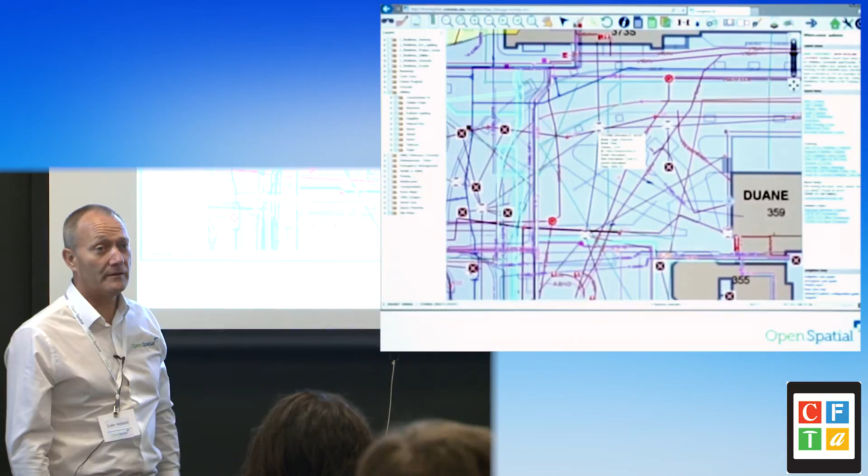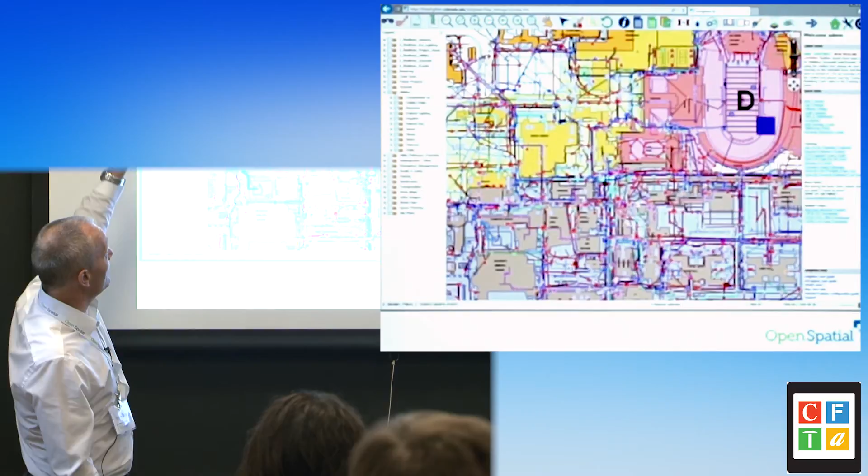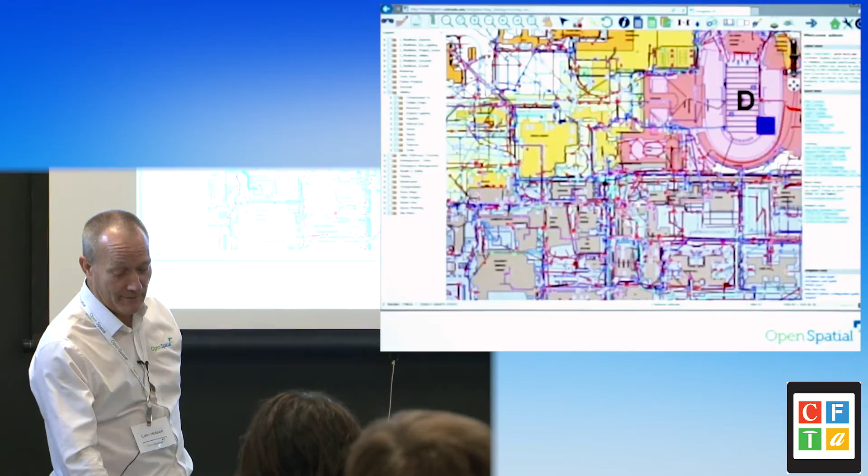So as you move around, let's page up a little. This is probably an older screenshot, but in here you've set up the categories and legends. The Enlighten framework gives you full control on users, who can see what, who can change what, can they do redlining, all of that stuff. You just set up the user admin for that. You can set up things like tooltips. That's pulling dynamic data out as you move around.

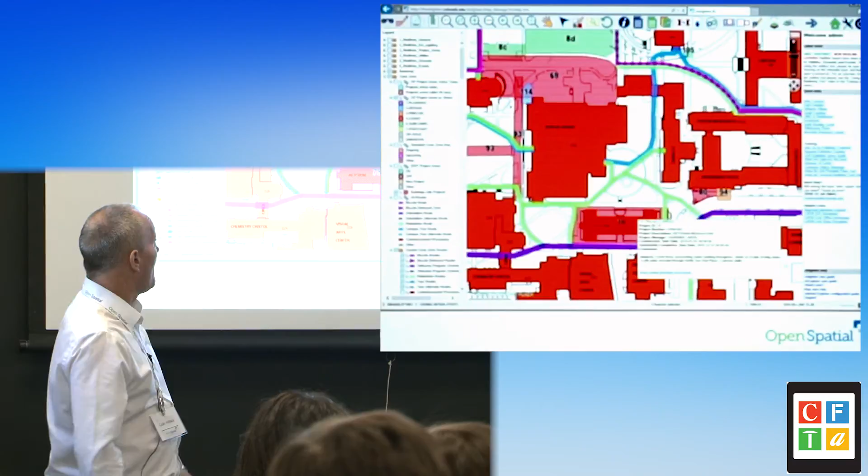Here's the ground panels with all the ground treatments. Here is the buildings and tying in with project management. Let me page up, that's gone too fast. So these guys can actually draw outside projects. They redline. It's right here.

This will be like the project managers. They can redline on the browser, and then it will tie in to the project management data, which will put in. So as long as they put in like that number 78, all we need is the polygon with 78. That's all that's put in. And they do it in the browser. They don't need Munsys to do it in the browser.

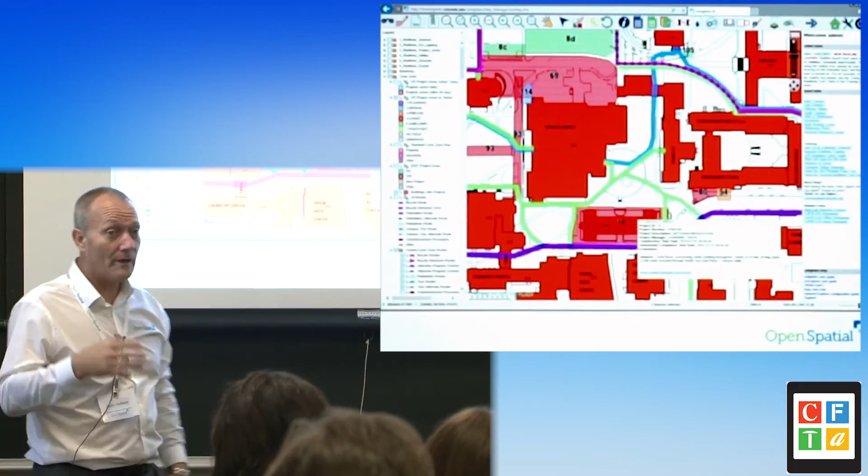And they can then control whether it's visible or not visible, or whether it's been displayed by date. So a lot of these projects you can see year to date or active or within the next 90 days and stuff like that. So there's a real example. You can select things and get reports on them. Here's a drill down report. You can have hyperlinks and tie with other information.

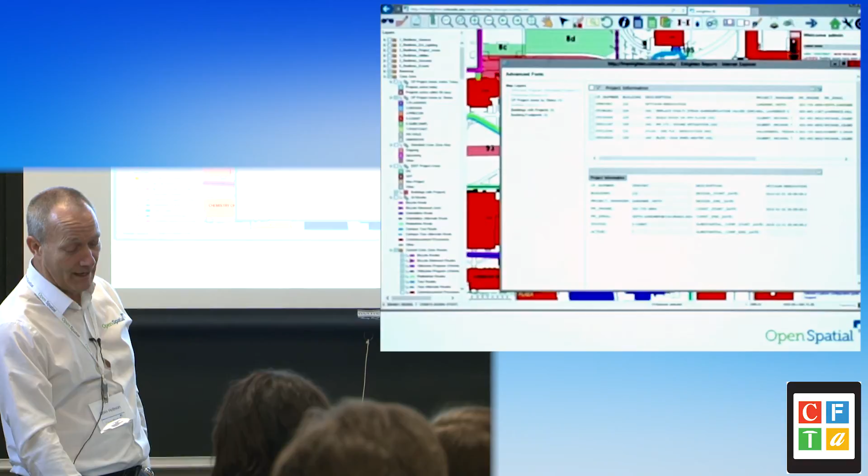Right, I'm running out of time.

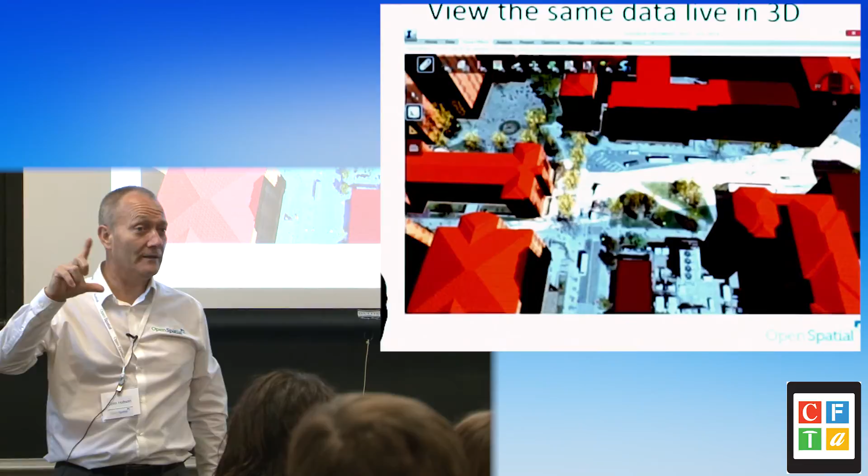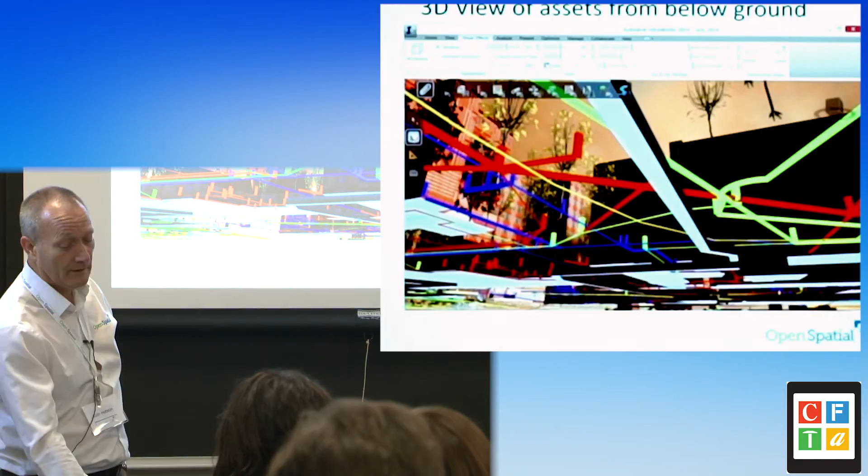These trees are actually GIS. So we've got evergreen and deciduous, and so the height of the trees is being read out of the database and scaled inside of the model. And so you can actually see that information right there. If I back off the image, you start seeing the stuff. Here's the tunnels, access tunnels underneath, and all that stuff. You can zoom around. You go underneath, pick up a pretty interesting intersection point there.

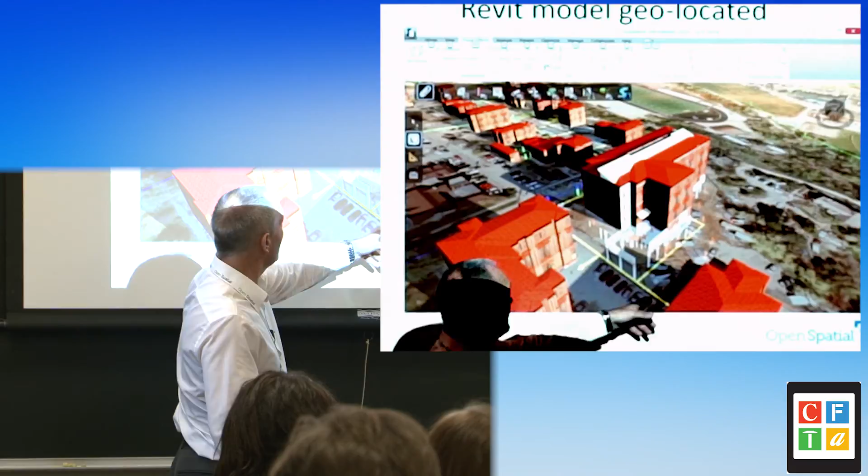It's InfraWorks, so now we can have the Munsys data. So this would be gas, storm, water, sewer, new building, Revit model. So you can start playing the futures and you can look at where existings are and all of that stuff tied in there. So what I've tried to show you is from CAD, actually paper, to CAD, GIS, and a bunch more things. Questions?

So how long does it take to convert one complex CAD? Question is, how long does it take to convert a complex CAD drawing? Yeah. Is it pretty cumbersome? No, this is about the fastest you're going to do it. We're converting in batches. You set up the rules, you select them all, you do them. Done. Like all the sewer and drainage nodes, you do that in 2 minutes. Just set up the profile, you do it.

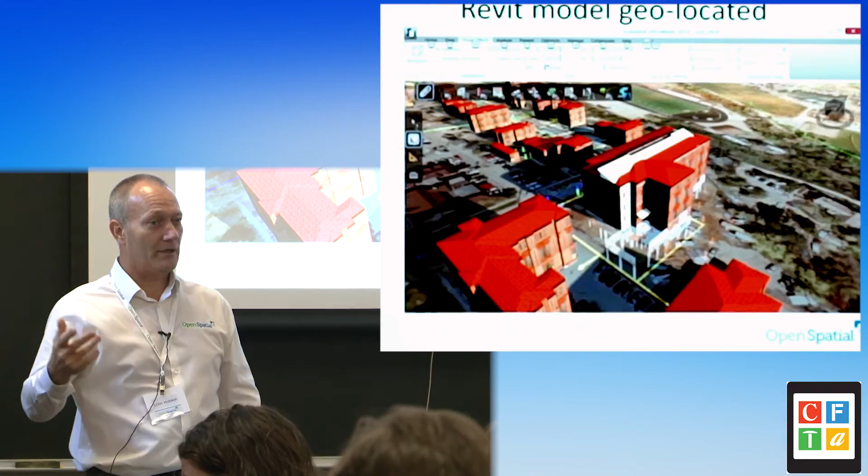The problem becomes where you have to hand go through the thing and say, well, wait a minute, that wasn't a block anymore, it was a circle, and so now I have a little thing that just says, okay, put one of those down there, delete the circle. And then the other one is like, if you're running through and joining those pipes, that's a pain. If the CAD drawing's clean, it goes real quick. If the CAD drawing has data in it, our stuff is exceedingly valuable because I'll pull in all the object data, any of the CAD properties, load those in.

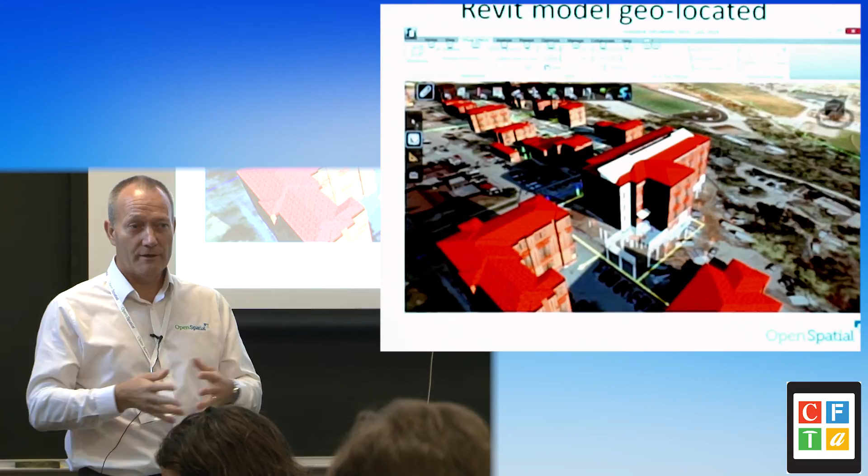So how long does it take? Well, it depends. What I normally do on a project is I say, give me your CAD drawing, I'll look at it, and I'll tell you, okay, X number of days. These attributes, done. Okay. Question at the back, red shirt.

Oh, I was going to say, too, if you don't mind me saying, we use Munsys, and I've had projects of similar size go anywhere from a day to a week. It just depends how dirty the files were when we got them. Make no mistake, it's work. Converting CAD data is work, and it depends on how good or how bad the data is.

But with these tools, you know that as you're cleaning up this drawing, you're actually creating an asset inventory that's in check, that it's got integrity, and so you really are moving forward. Whereas if you're just cleaning up a CAD drawing for cleaning up a CAD drawing's sake, you're kind of treading that treadmill. It really doesn't help that much. I mean, it's a start.

Questions? Yes, Mohammed. Is it practical to add other objects like, let's say, buildings, houses, streets, sidewalks? Whatever you want to maintain. I mean, if you look at like Boulder, they've got all of that stuff in there, but for the buildings, they're just doing the building footprints, and then the floor plans are coming straight out of the space management system, and the building information is coming from the building information system, but the outline is on the map.

So as you move over the map, it gives you the data out of the other system. You just have to decide. I'm not saying Munsys will do every bit of data for everybody, but it's exceedingly well suited for the CAD data that you've got.